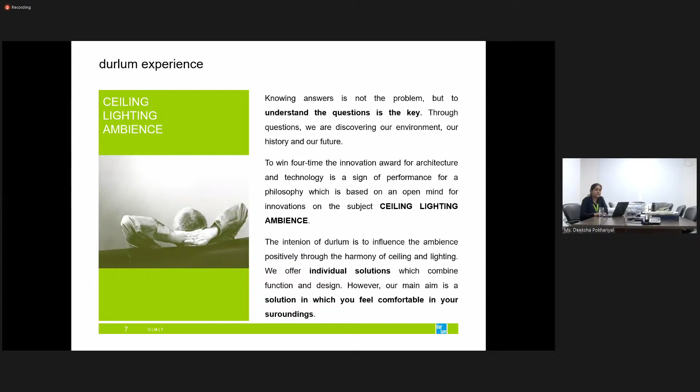As I've already spoken about what we deal in with ceiling lighting systems, these are the basic manufacturing ceilings which we manufacture: closed ceilings, open ceiling, functional ceiling, raft ceilings, and design ceilings, which we take care of in India. Apart from this, we do a lot of project lighting, exterior and interior lighting, light management, daylight systems - but we are not doing that here in India, so I will not be elaborating on these points.

So if I say why false ceiling - the answer is false ceiling is the most unobstructed area where you can see the interior space of any project. The basic benefits of false ceiling are: it conceals wires, gives soundproofing, fire safety, energy efficiency, moisture and sag resistance. So basically, false ceiling conceals wires and saves energy. At the same time, it can be decorative as well as an air regulator. You might have heard about chill ceilings and hot ceilings - these days people are investing in ceilings that automatically regulate hot environment in winters and cold environment in summers. They can be functional as well as aesthetic.

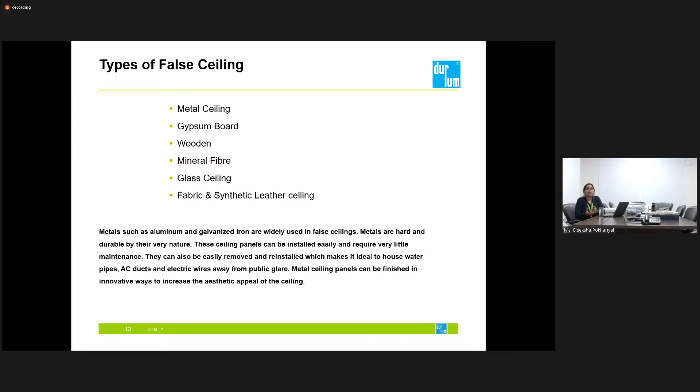And if I talk about metal, as its name suggests, it is very rigid in nature. So it is long lasting, it is not biodegradable, and it gives a very nice aesthetic appeal to the ambience of the project or room where the specific ceiling is used.

So why metal ceiling? I have already spoken about this, that it gives a modular design to the building. You can integrate light in many forms. You can suspend it, flush it with the ceiling, run around it, or if using open cell ceiling, you can use light above the ceiling to reduce the glare produced by LED lights these days. These ceilings are hingeable, so services can be maintained very easily.

Metal ceiling can give you acoustic variances, wherein you can create multiple perforation patterns and achieve up to 0.7 NRC using mineral wool, acoustic sound tissue, or rock wool.

Then it is rigid, so it is ball proof. If you throw a ball onto the ceiling it will not get damaged easily, and it is flexible also in terms of design, in a number of shapes.

If you need, I'll show you later on. If you need triangle panels, that is possible. If you need circular panels, that is possible. Hexagonal panels, that is possible. A number of powder coating patterns can be done.

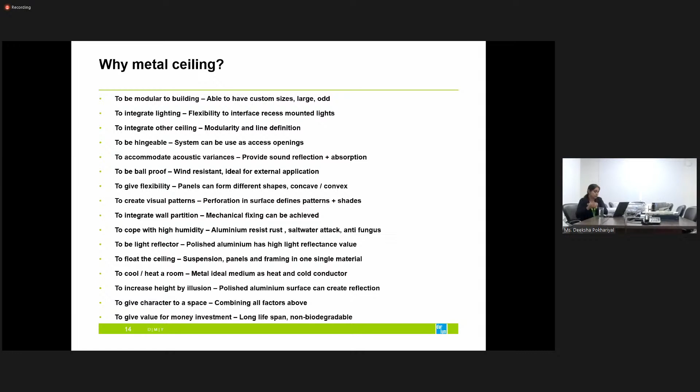So when I talk about ceiling, the major and most important part is acoustics. Acoustics is basically how we can reduce down the noise created in a room, where echo is not produced. So the major role in acoustic is the perforation pattern.

So there are a few standard perforation patterns, as well as some good looking perforation patterns that can also be done. I have already spoken about graphics onto the ceiling, wood designs, custom logos. Everything can be done, and we can achieve NRC, that is noise reduction coefficient, up to 0.7, that is 70% of noise is absorbed back.

So not only with the ceiling, the entire ambience matters. If I talk about flooring, carpet helps in reducing the noise. Furniture helps in reducing the noise. Wall panels and dry walls help in reducing the noise. So overall, 70% or 80% NRC is the maximum range that any product can give you for absorption of sound.

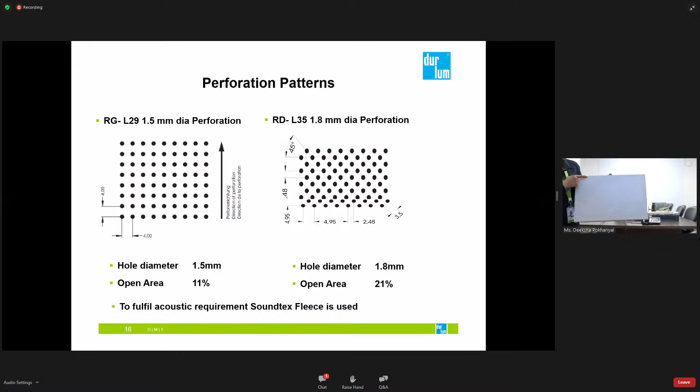Yes, ma'am. So this is basic 1.5 mm diameter with around 11% open area, and it can achieve up to 0.7 NRC. It is basically linear. If you see the pattern, the holes are in line, so this is linear 1.5.

Then similarly, we have a pattern of 1.8 which is diagonal, having a pitch of 45 degrees. So these are the basic things in any ceiling or wall panels where acoustic requirements can be achieved according to the requirement of the particular project.

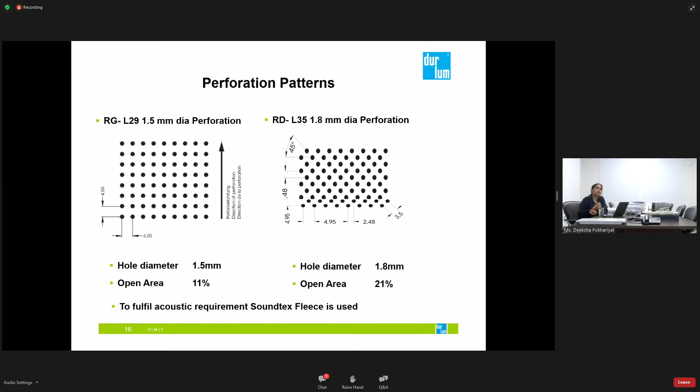Then coming to the products which Durlum India is manufacturing, as I have already told you, we are manufacturing open cell ceilings, closed cell ceilings, corridor ceilings, functional ceilings, and aesthetically appealing ceilings as well. So the number one ceiling which I am going to show you is Leva.

This is Leva. It is an open cell ceiling. I'll just show you the ceiling sample. Just please let me know, is it visible? Yes, ma'am. So this is Leva.

These are 150 by 150 panels, and they are 360-degree rotatable panels. It is multicolor in nature. It can be multicolor, or it can be in single color as well.

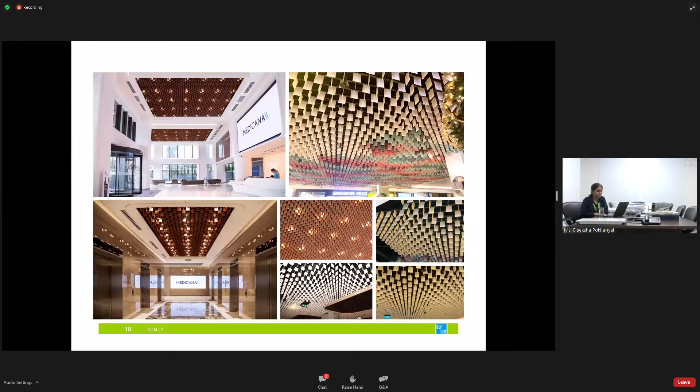Next is Geo. This is a grid ceiling.

All the panels of this ceiling are 1200 by 600, and it is a 100% hingeable ceiling. If it is hanging this way, any and every panel can be hinged to 90 degrees and services can be maintained. So the size of this grid can be changed from 50 by 50 to 75 by 75, 100 by 100, and so on and so forth.

What Durlum does is we have our proprietary system of hanging, that is U94, but you can use it in T-grid format also. You can install a T-grid and put 600 by 600 ceiling panels onto it, but it does not look good. It does not give you a clean view. This is all Geo.

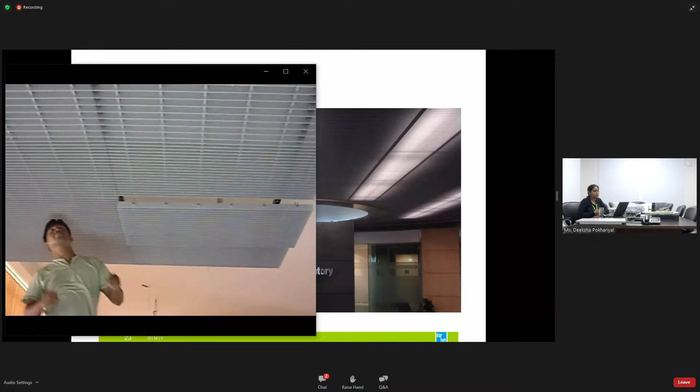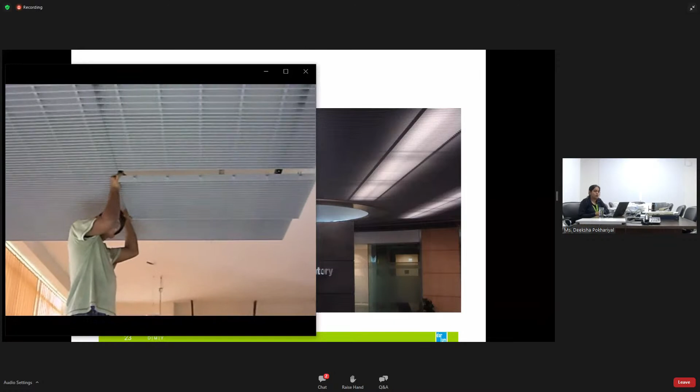I'll just show you the demounting of this ceiling. You can see in this video how this person is demounting the ceiling system. It is basically a U94 system wherein 4 clips are attached. You can loosen these 4 clips, and from anywhere, horizontally or vertically, you can just pull down two clips and the panel is hinged.

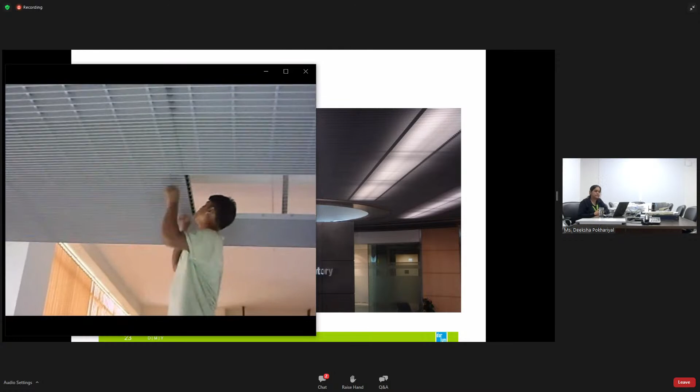So you don't have to remove the ceiling, and you can easily maintain the services, the wiring, the ducting - anything can be done. See, he's removing another panel as well.

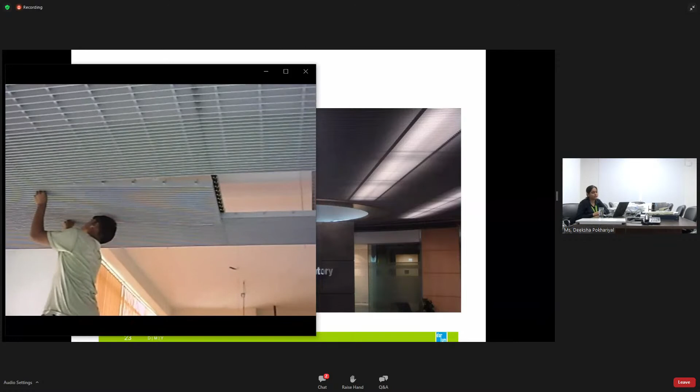So this way, open cell helps in many different ways. One, it is hingeable. Another, you can incorporate lights - above, beneath, or flush with the ceiling. In this IBM project also, you can see the lighting is above the ceiling. You can play with different elements of ceiling and lighting with the open cell ceiling, because suspension is very easy. You don't have to cut the panels.

This is T-cell-N. It is a single blade interbedded ceiling. Again, the panel size is 1200 by 600. It is similar to Geo. Installation is similar in any open cell ceiling which durlum is manufacturing, but it gives a 3D effect when the light is above. We suggest the influencer to use light above this ceiling specially.

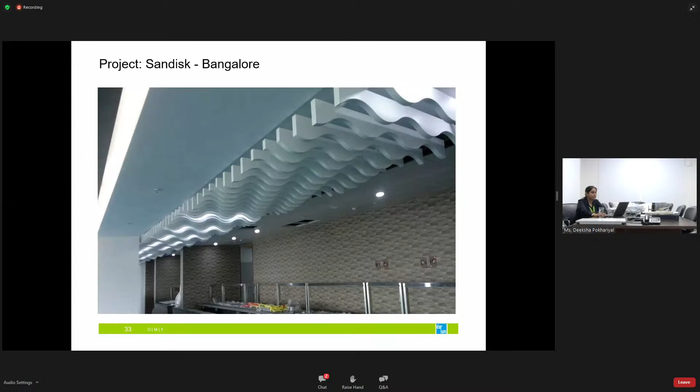We have our own designer team which helps us customize these kinds of ceilings. So this is again a different kind of wave pattern.

This is Bethel Grid. I'll just showcase you the wood finish in Bethel. Is it visible? Yes ma'am, this is wood finish one.

Another finish is this. There are various different finishes which can be done through printing. Finish is visible. Yes ma'am, I'm sorry, I'm asking your help again and again. No ma'am, please don't be.

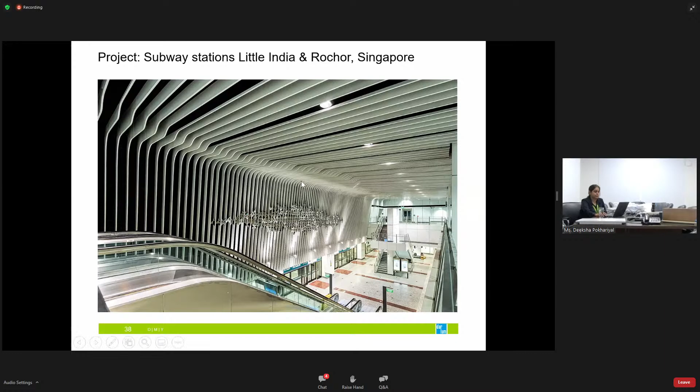Now I am coming to the closed type ceiling systems. This is custom perforated ceiling system. I have already shown you the basic perforation patterns. Now I will showcase you various custom perforations.

See, you can see 40 mm dia into this. You can backlit it, or you can use acoustic fleece to absorb sound.

This is another type of perforation. This is triangular perforation, and it is in gold in a nice finish. These are triangular panels with triangular perforations.

So all these perforations are done through CNC cutting machine, so any design is possible. I'm showcasing you.

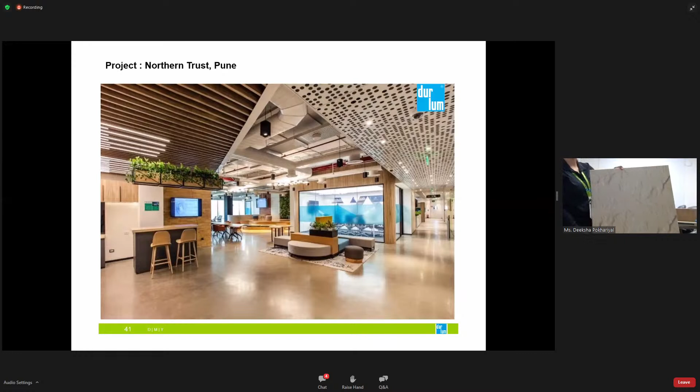I think you people are getting a little bit interested. I'm able to engage you.

So, custom perforated panels. I have already spoken about backlighting of the panels. See, in this, a pattern is created onto the wall, wherein the design is created with the help of different perforations.

This is the IICC Dwarka project wherein we are doing triangular panels. They are backlit as well as triangular in perforation also. See, this is the light backlit panels, these jali designs can be produced. I just, if it is not too heavy, I'll showcase it to you also.

This is too heavy for me to lift. Otherwise, I would have shown you this.

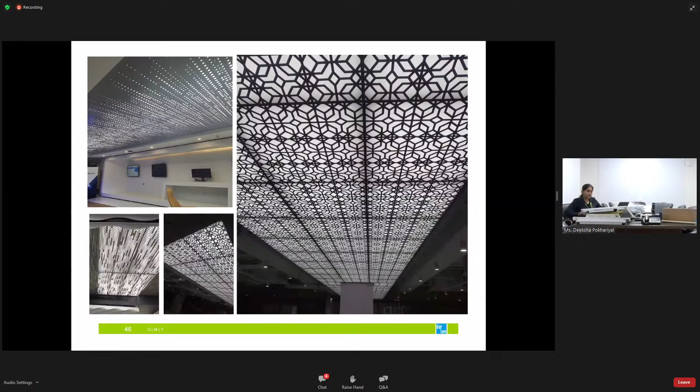So basically, you can go and see the products in any of the Arena showrooms wherever you are present in India. You can visit Maruti Suzuki Arena showroom and see these wood grain finish ceilings there.

This is a trapezoidal ceiling. I have already spoken about trapezoidal installation of baffles. Once a building is radial in design, if you use 2x2 tiles, at the end it gives you a shabby look, with a lot of cutting of the panels. So we have come up with a solution, and we give trapezoidal panels in which the width of the panel from one end to the other end varies.

You can see this sky effect in the Buddha Vanam Hyderabad project. We have done this dome as well as the petals. These are metal perforated petals which go from the ground to 22 feet high. In the dome, we have created a sky effect through UV digital printing. These panels are perforated and acoustically treated, so in the meditation hall you cannot hear the echo.

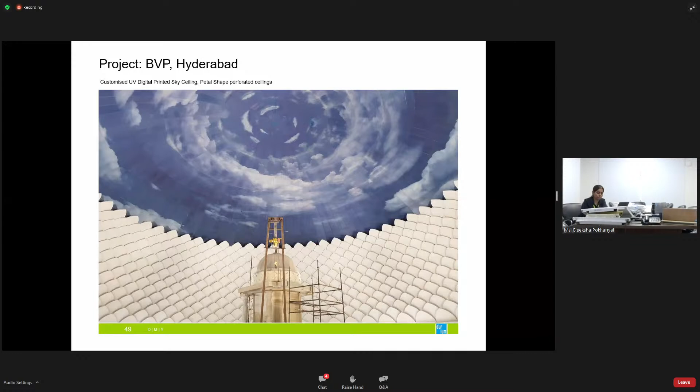Then in closed cell ceiling, we also have mesh ceiling. Recently I showed you all the panels which are linear in nature. This is mesh ceiling, but the panel is radial. You can see it is having an arch, so it can create waves like this. You can use acoustic fleece or any infill panels in this if you want to.

Light is beautifully incorporated with the ceiling systems. Corridor ceiling systems, basically we use them as a trapdoor ceiling system. I'll just showcase a video. This is a corridor, and these are the installed ceiling panels.

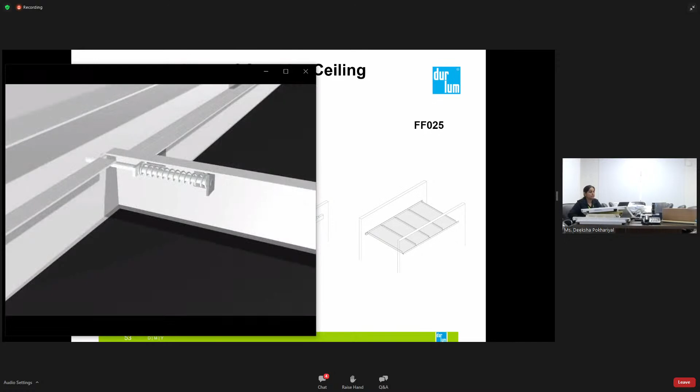Now the panels are hanging down and we can push them back. It works on this spring system and you don't require any tool to open the ceiling. With the help of bare hands, you can open this. So the beauty of this product is that it swings down and pushes back. Apart from this, it is customized to the width of your corridor, so that becomes our length of the panel.

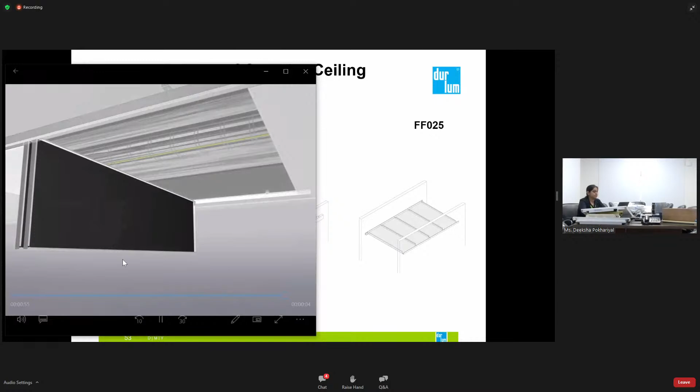Or any hotel or school wherein services are coming into the corridors and you have a patch to maintain, you can use this kind of ceiling, and they can be powder coated to any RAL shade. They can be graphically printed. For example, if you're doing any kindergarten project wherein you need a lot of graphical printing of Mickey Mouse or any other theme, you can digitally print those themes onto the ceiling and place them.

Another ceiling system is FS 4.4 AS. It is basically a drawer kind of system. Drop down and push back.

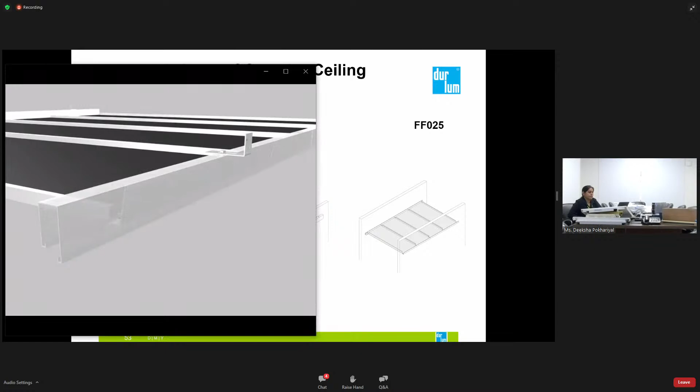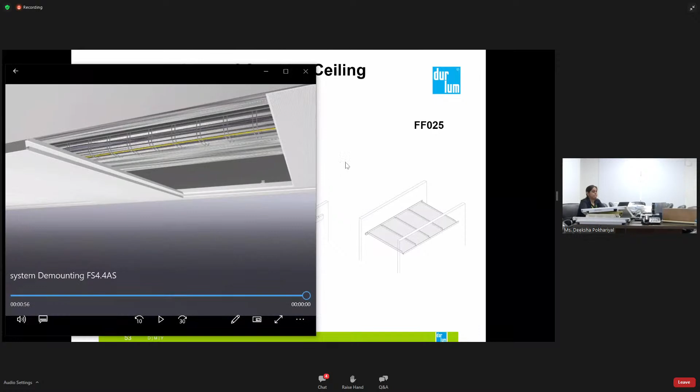So basically, what is happening? We are pulling down the panels and pushing them back. In this case, there is one drawback: to move two panels, you need a minimum of two stationary panels. In the earlier one, you don't need any stationary panel. The third one, FF025, is very basic. You just need two L angles or wall angles wherein we can place our panels onto it, and they are basically removable like T-grid ceiling systems.

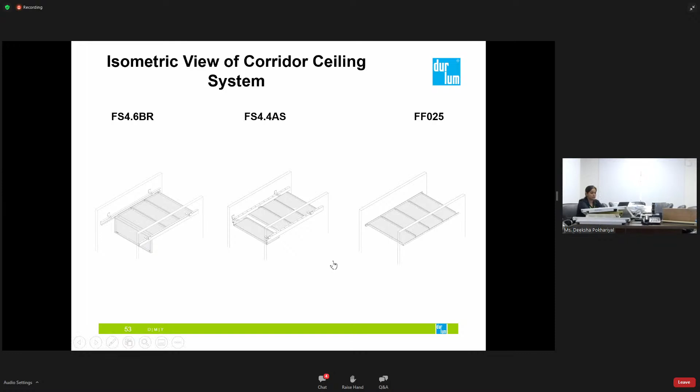Then Lumio and Tumio, these are my favorites. Lumio is basically light, I have already spoken about it. It is a handcrafted light manufactured using a fabric called Dura Satin. This is the fabric, and it is a stretchable fabric. You can see I am stretching it back with full force and it is coming back. They can be printed with any 3D printing or design just to create an effect, so it is again a printed panel. You can see on the screen that these panels are printed.

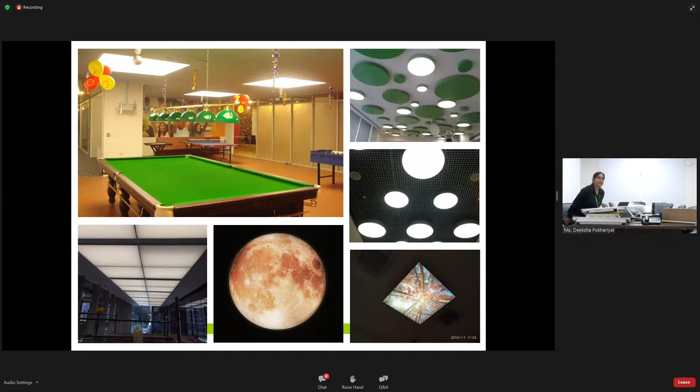They are basically lit ceiling or Lumio lights. Tumio is basically a ceiling element, you can see the green part, the green circles. You can create certain designs like this. Lumio is on the wall as well as on the ceiling. The Lumio Tumio combination can be used in cafeterias, games rooms.

In the form of ceiling patterns, you can use Lumio lights. You can use just Tumio ceiling elements with gypsum board or any other ceiling. You can create various designs. Design is your ability to design. You think, and we can create it.

That is all about Durlum. I hope people have got interest in this and I'm able to deliver the best out of me. Any questions are most welcome.